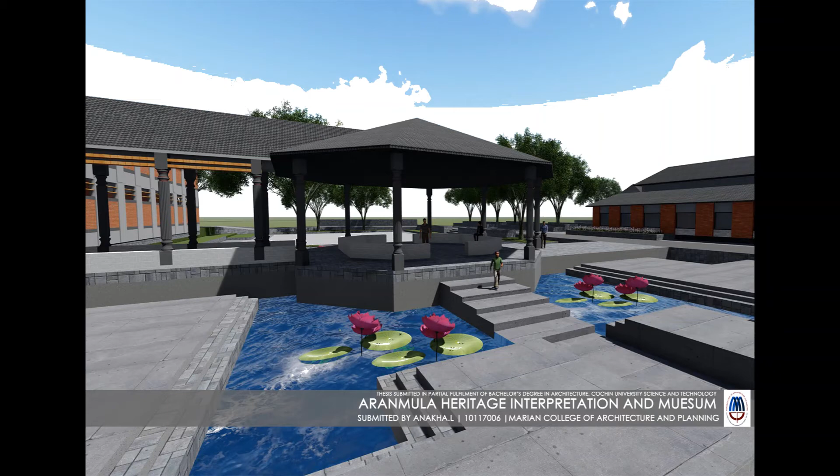My thesis project is Aranmula Heritage Interpretation Center and Museum. In 2018 the flood greatly affected Aranmula and caused several damage to traditional heritage units like Paliyodam. Post-flood, several historical sculptures were also discovered from the affected area. To conserve these valuable antiques, they arrived at the concept of a heritage museum in Aranmula. The aim of the thesis project is to develop the land as a major heritage and cultural activity center for tourists, focusing also on local economy restoration by generating local employment which boosts the local culture and tradition.

Aranmula is a village in the Pathanamthitta district of Kerala, about 100 kilometers southeast of Kochi, near Kozhencherry town on the banks of the holy river Pamba. The word Aranmula evolved from two stories: one is six pieces of bamboo, where the idol installed in the temple is believed to have been brought by the Pandavas on a raft made of six pieces of bamboo. Another reason is the word Aranmula is derived from Aran village, meaning fertile land on the banks of the river.

Next is a timeline chart showing the emergence of culture. It is believed every civilization started with the formation of agriculture. The Pamba river valley is the most fertile region, and its fertile soil was best suited for agriculture. Thus, they started agriculture and slowly began their order settlement. In order to worship, they constructed a temple between the 6th to 7th AD, and it became part of their life. For attaining leadership, people selected a representative head to control and rule the region.

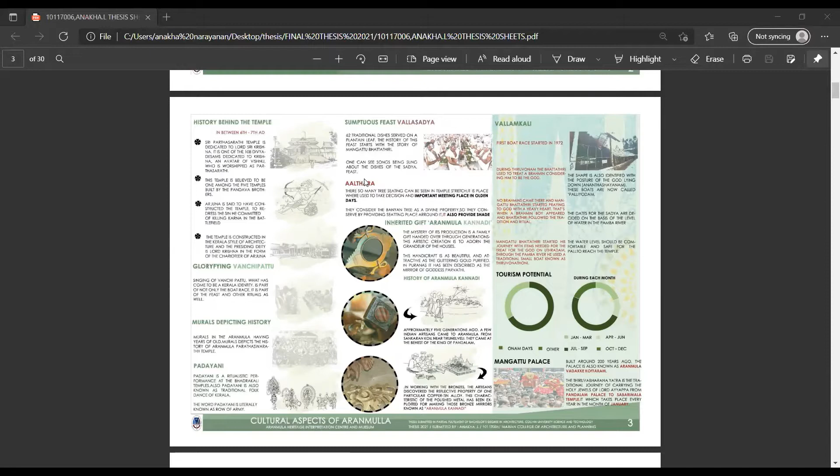Other cultural significances of Aranmula include mural art, Padayani, Kalari, etc. The village is famous for the genius of its craftsmen and the ancient Onam festival, conducted in the month of September. Tourism is also higher during Onam days compared to other days.

Next is about the present scenario and user group study. The Kerala flood of 2018 caused loss of life, economic loss, and damage to cultural heritage, which was most vulnerable during the flood. The Palliyodams and Aramula metal mirror artisans had huge losses in the flood. On the other hand, several valuable historical sculptures were found from the affected area. Terracotta sculptures found on the banks of River Pamba show that a rich civilization had once flourished along the river.

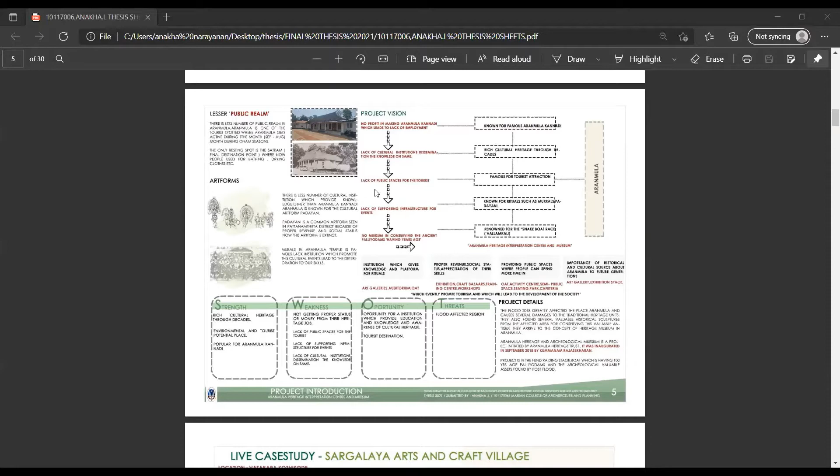This timeline chart shows the project vision, and these are the issues I analyzed from the present condition of Aranmula. The major objectives I arrived at are: an institution that gives knowledge and a platform for rituals, proper revenue, social status and appreciation of their skills, providing public spaces where people can spend more time, and importance of historical and cultural sources about Aranmula for future generations, which evenly promotes tourism and leads to the development of the society.

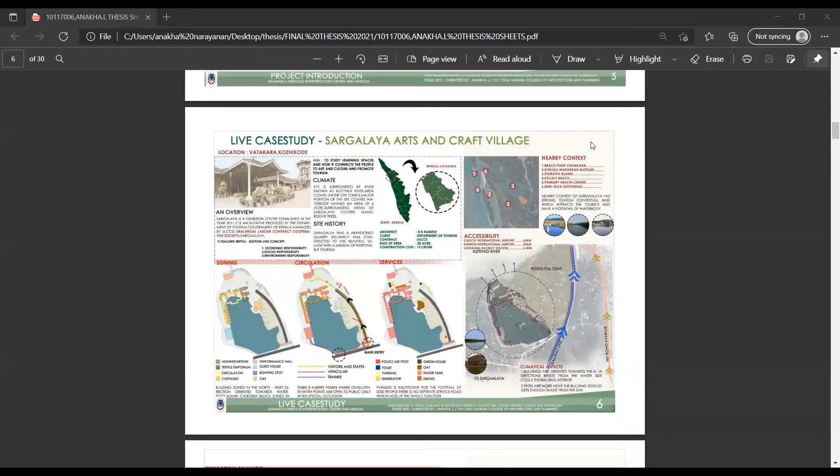Next is the case study sheet. I have done 3 live case studies: Sargaalaya Arts and Crafts Village at Iringal, Vadakara, Kozhikode; Dakshin Chitra Museum, Muttukadu, Chennai; and Koikal Palace, Nedumangad, Trivandrum. Next are the literature case studies: Virasat-e-Khalsa Museum, Anandpur Sahib, Punjab, and Shanghai Natural History Museum, China. I have prepared a case study matrix based on selection criteria, spatial design innovation, structural design innovation, circulation, zoning, and built-open nature.

Next is the Dakshin Chitra Museum. Selection criteria: to study the spatial manifestation of public realm within the complex. The spatial innovation creates a strong sense of public realm within the complex. Structures are built which blend into South Indian surroundings. Structural components use the vernacular architecture style of the respective area. Circulation: multiple circulation is used.

Next is Koikal Palace, Nedumangad, Trivandrum, studied for its archaeological museum and different functions within it. It represents the traditional Kerala architectural style. Spaces inside are divided into exhibition spaces. It is a conserved structure, a traditional Nalukettu building with a central courtyard in the middle. Circulation: single entry complex, with external spaces allowing free movement.

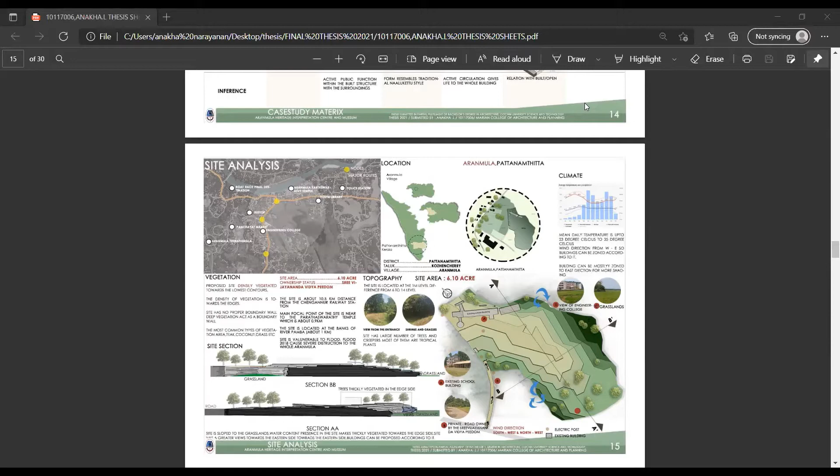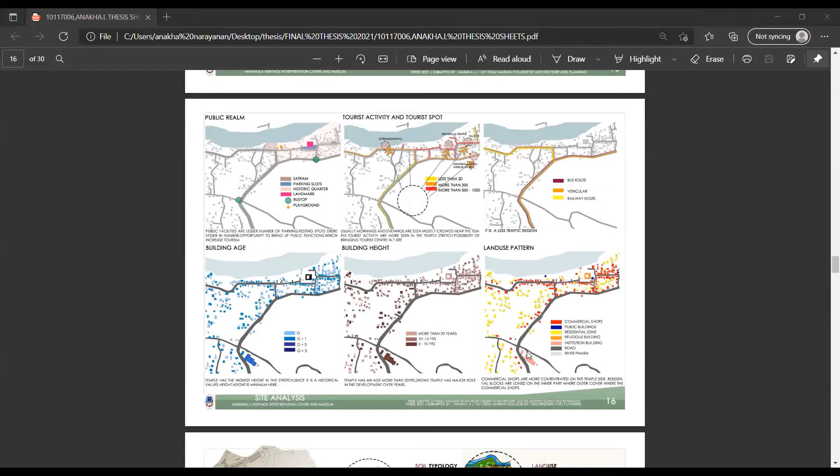Moving on to the analysis: Strength - it is a proposed land for the archaeological museum project, with good potential views around the site, a low traffic region, and less noise pollution. Weakness - the site is surrounded by wetland area, and has a school building that is temporary in nature. Opportunity - it improves the socio-economic status of the community, enhances tourist potential, and increases public amenities.

Next is the special topic sheet, that is 3D art gallery. An art gallery is a space that should educate and help people understand the real value of art. Most art galleries fail to maintain the network of connection that defines the fine arts, since we are just following a traditional method of exhibition.

Features of an art gallery include good lighting condition, good audiovisual, and good circulation. People fail to recommend the exhibition or return if any one of these facilities is inadequate. Majority of the museums in Kerala are following traditional museum exhibit facilities.

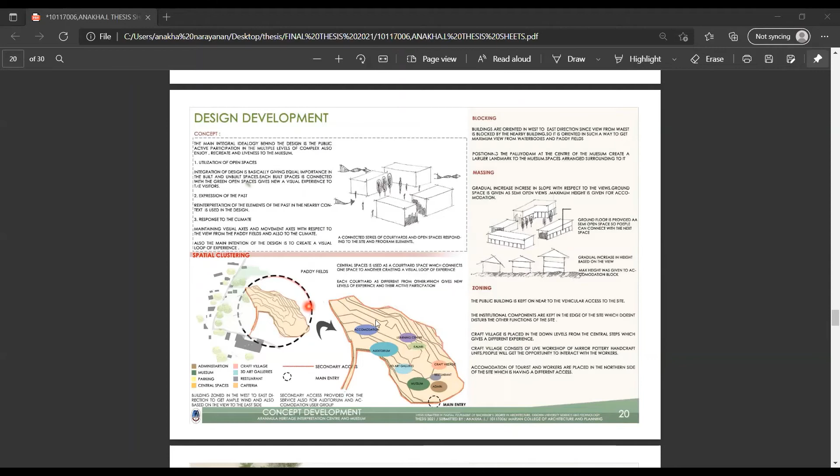Accommodation for tourist workers is placed on the northern side of the site with a different access. Moving on to the roof plan, the main entry is given on the southern side, and the secondary road is used as a service road.

Vehicular movement has been restricted to the periphery only, so as to have a maximized pedestrian zone. Service circulation is given near the edge of the site so it doesn't disturb the main function. Parking is given to the eastern side after the drop-off to the entrance mandapa.

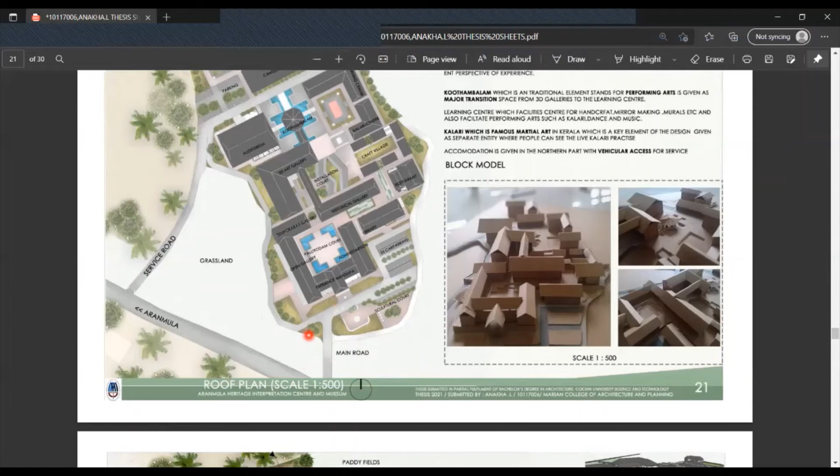Separate parking is given for the auditorium, accommodation, and learning center. A sculpture court is given in front of the museum in order to regulate traffic flow to the site and also to create community involvement.

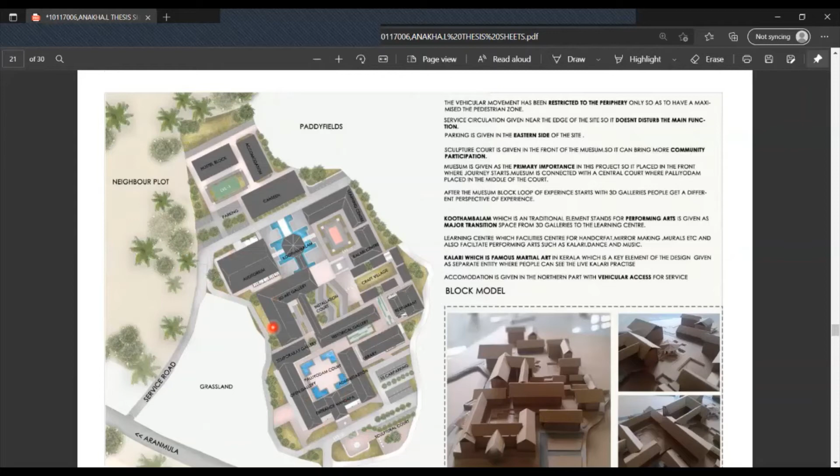Moving on to the built zoning, public buildings are placed near the vehicular entry, while semi-public and private areas are mostly placed near the secondary access. Visitors enter into the entrance mandapa from the drop-off and proceed to their destination.

The administration block is zoned on the eastern side from the parking and has a separate access, so its function and activity don't disturb other functions. This is the site plan. Moving on to the built planning.

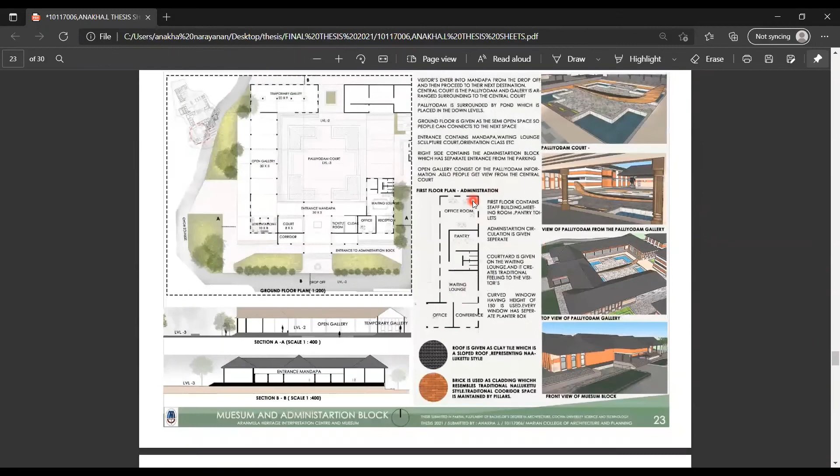The journey begins with the Palliyodam Gallery. Visitors enter into the entrance mandapa from the drop-off and proceed to the next destination. The entrance contains the sculpture court, ticketing counter, cloakroom, and corridor spaces, and the journey starts right after this orientation hall.

The Palliyodam Gallery is a semi-open space where you get basic ideas about how the Vallamkali originates, related folktale stories, etc. So people get an idea about the Palliyodam and can also connect with this Palliyodam court. The Palliyodam, which is the largest artifact, is placed in the central court, giving a major landmark to the site.

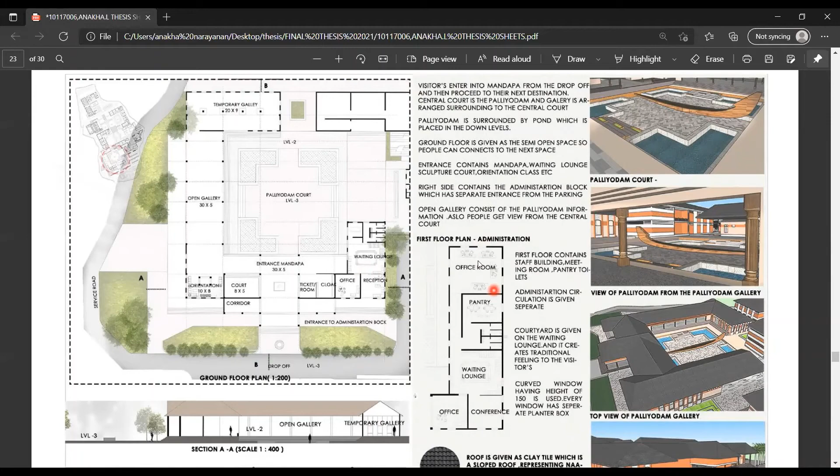After the Palliyodam gallery comes the temporary gallery space, which displays terracotta sculptures, etc. The administration block consists of office, reception, waiting lounge, pantry, toilets, etc. This plan shows the first floor plan, which contains the office room, pantry, etc.

Next comes the 3D art gallery, placed after a transition space which is a semi-open space. Visitors get a distance view of the Palliyodam court and also the craft village. The 3D gallery has a different function compared to the other gallery, which is a modernized gallery where people get a 3D viewpoint. An installation court is given in front of the 3D gallery, so each court space has a different character according to its space.

Ground floor consists of VR gallery, 3D holographic projection, and 3D installation, which has a separate ticket counter. The cafe is placed at the end side of this 3D gallery, a semi-open space where people can enjoy the outside view. An open exhibition space is given near the cafe, and the flood-related artifacts are placed in this ground floor.

The first floor consists of 3D paintings, miniature structures, storage, artifact gallery, and also the mural gallery. Vertical ventilation is used for this 3D gallery instead of windows, since darker rooms are more preferable here.

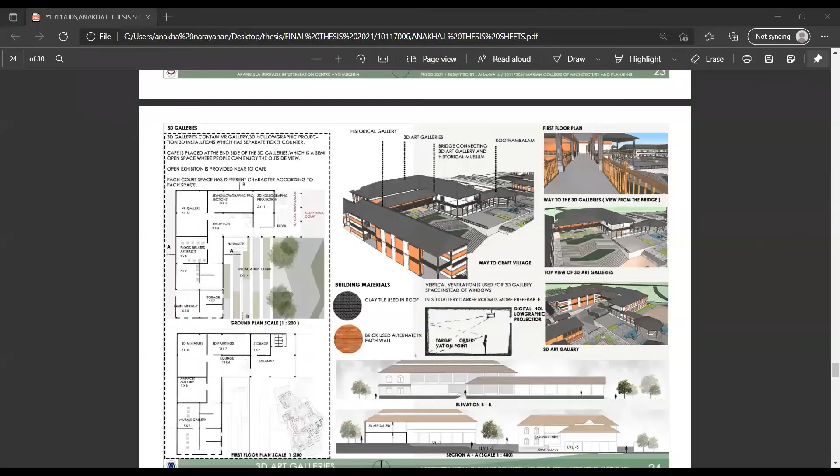Next comes the historical gallery. The historical gallery showcases Aranmula's historical assets right from its evolution - the Aranmula Kannadi origin, the family generations who follow the rituals and customs, etc. People get basic information right from the evolution.

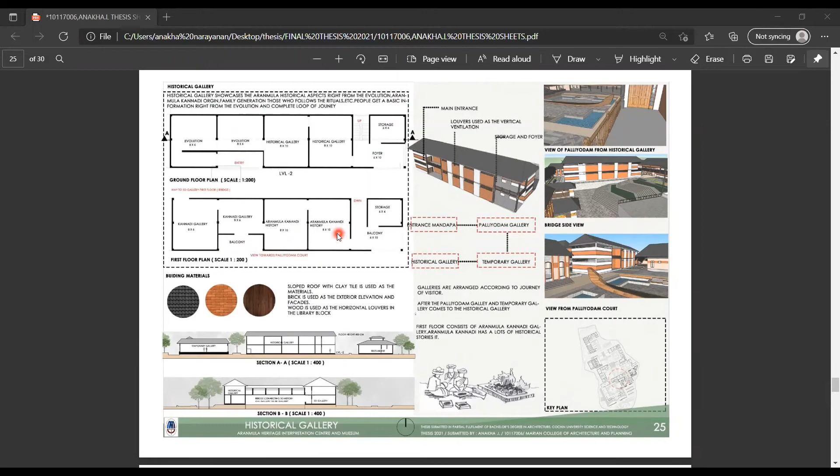The ground floor consists of the evolution gallery, historical gallery, storage, and foyer. The first floor consists of the Aranmula Kannadi gallery and a balcony space, the Aranmula Kannadi historical gallery, storage space, and a foyer.

This is the Live Craft Village. It is located between the 3D gallery and museum space, and is also separated by levels, which adds community income to the site. An energetic environment is created which encourages the workers, and viewers will feel the pulsating energy of workers as well as the liveliness and spirit.

The Craft Village consists of an open exhibition showcasing the workers' works, active shop bazaars where people get the opportunity to buy artifacts, and live workshops including murals workshop, stone workshop, Aranmula Kannadi workshop, pottery workshop, and handcraft workshops.

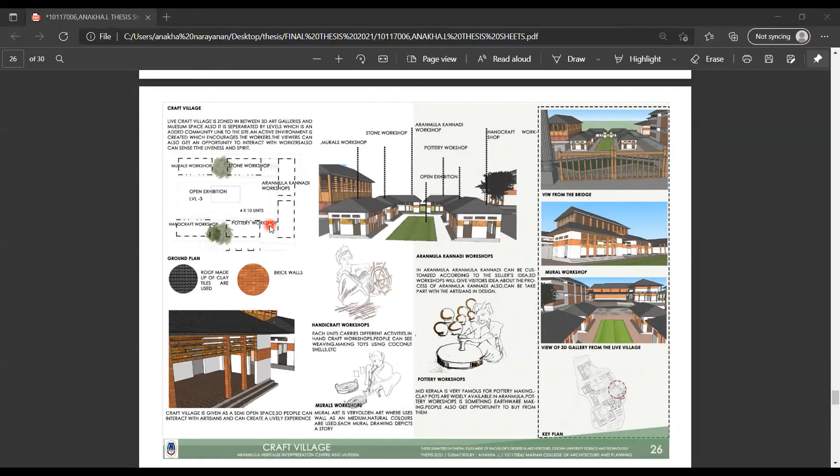Next comes the library and restaurant block. The library contains an office room, exhibition space, discussion area, and a bookstore. The library block is near the parking area, given at level -2. The library acts as a communal space where local people can spend more time and also get an opportunity to read.

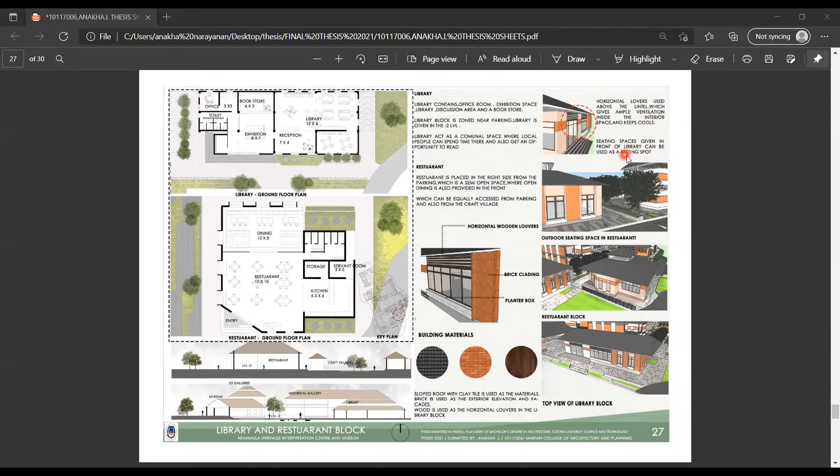The restaurant is placed on the right side from the parking, a semi-open space where open dining is also provided in front, easily accessed from the parking. Horizontal louvers are used above the lintel, giving ample ventilation inside the interior space and keeping it cool. Seating spaces given in front of the library can be used as a resting spot.

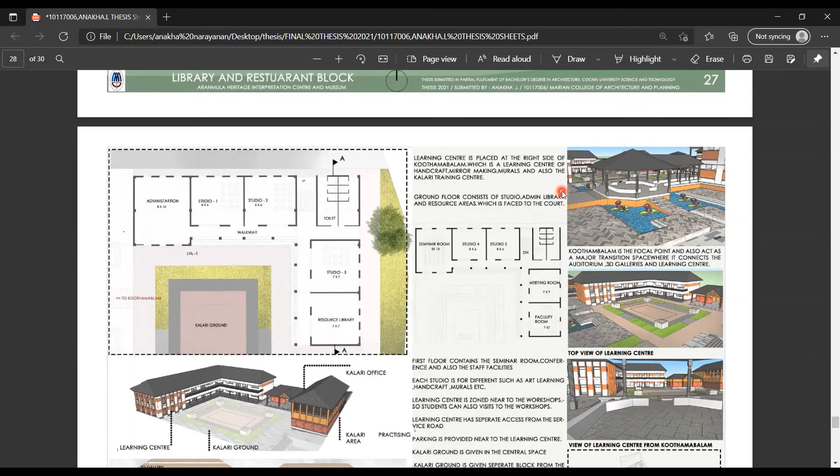Next is the learning center, placed at the right side of the Koothambalam. The main objective is to promote a teaching, learning, and practicing atmosphere, which will not only help students learn better, but also impart knowledge to visitors regarding various aspects of art forms and rituals.

The ground floor consists of a studio, admin, library, and resources area, which faces the court. The first floor contains a seminar room, conference rooms, and staff facilities. The learning center is close to the craft village, so students can also visit the workshop region. It has a separate access from the service road, and parking is also provided near the learning center.

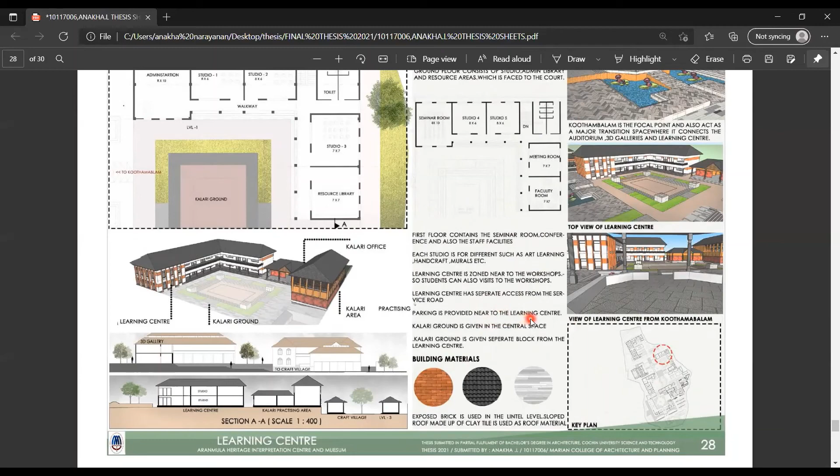Aramula is not only famous for the Aranmula Kannadi and Palliyodam, but also for the martial art Kalari. Kalari plays a vital role in the training and execution of performing arts. It has a vast scope to educate people about the dying arts of Kerala, their significant skills, along with the culture. Kalari is zoned at level -1, near the learning center.

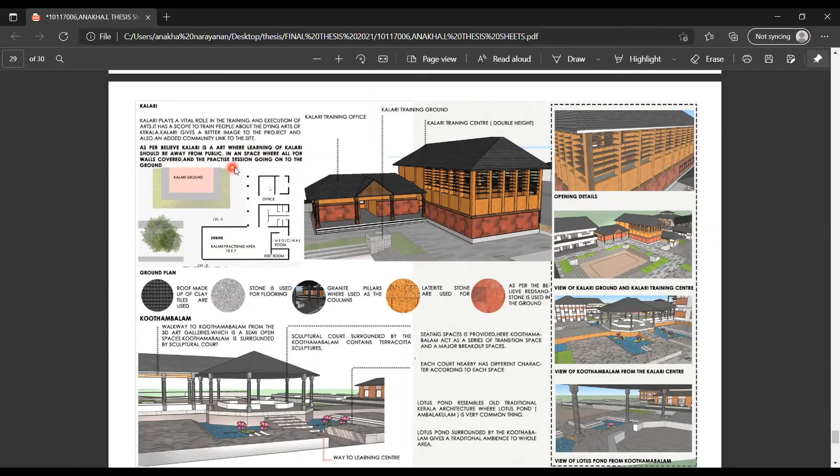As per belief, Kalari is an art where learning should be away from the public, in a space where all four walls are covered, with the practice session going on to the ground.

Koothambalam is directly connected through the art gallery, designed to connect the auditorium and academic space, forming a performing arena where artists can come and perform. The sculptural court is covered and surrounded by the Koothambalam, containing terracotta sculptures. A lotus pond surrounded by the Koothambalam gives a traditional ambience to the whole area.